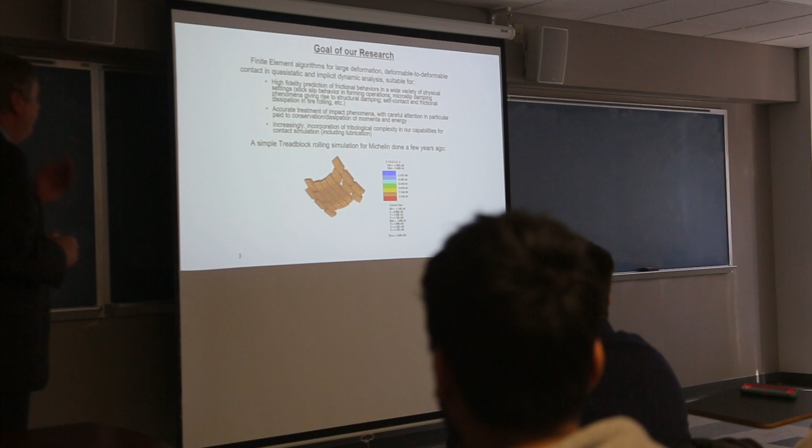So just to give you a little bit of an idea, again from a numerical point of view, how one goes about doing that. So I've already said a lot of this, but keeping in mind that I'm sort of a methods developer, the idea here is to come up with tools.

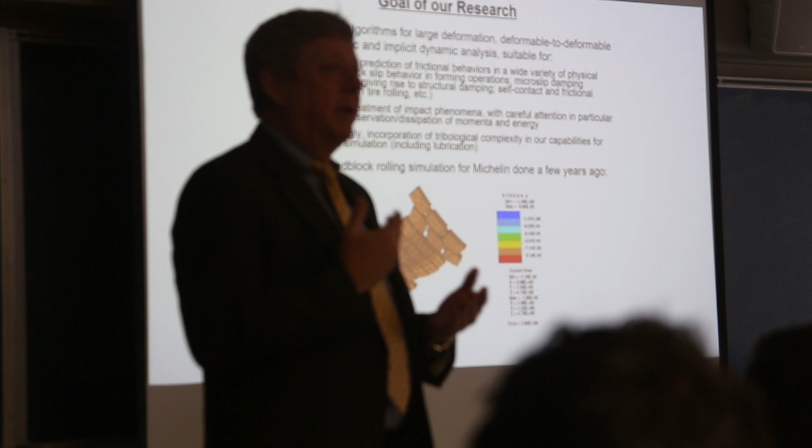You can think of them, hopefully, as being under the hood - not anything a user of a code like Abaqus has to worry about too much. But what we were really after was: use whatever friction model you want to use, whatever interface model you want to use, just like you employ a plasticity model or an elasticity model or an anisotropy model for a bulk solid. We'd like to give you the same sort of robustness if you have to describe contact interaction. But it's quite a bit different, right?

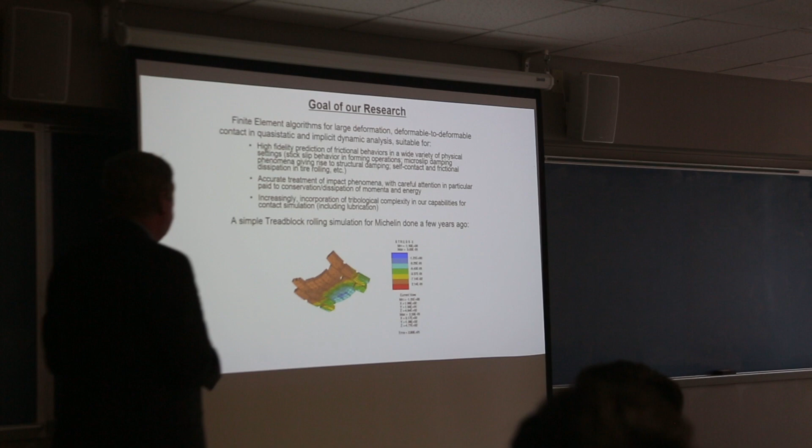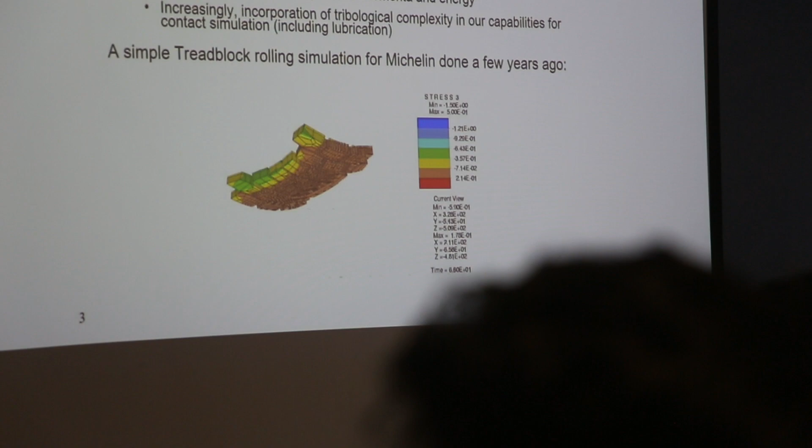And so I've got a sort of embarrassingly old movie here, but if you watch this thing go - this is a tread block simulation we did for Michelin a few years ago. So finitely deforming, basically this is a Mooney-Rivlin solid, actually contacting the roadway, which you can't see here. It's just taken as a rigid, transparent obstacle, right? That's actually the easy part of this problem. The harder part is the contact that occurs inside the sipes and the grooves as this thing rolls.

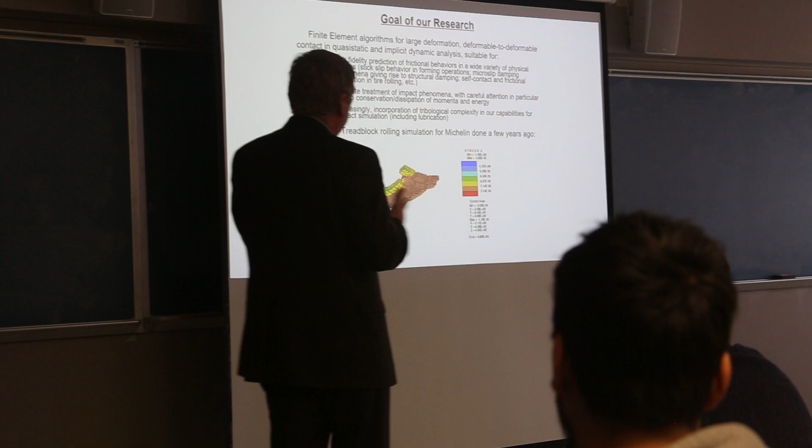And these are the kinds of things that, if you tend to run your tires too long, which I tend to do, you can actually see those wear patterns. And so the interest Michelin had was to actually model that and see if we couldn't get at the energy dissipation that was happening there.

And again, you can think of your favorite application. You've got contact, you've got friction, you've got large deformations, you've got potentially large relative motions. And so we'd like to come up with methodologies that will work without limitation on those things. And then, although I'm not going to talk about it a lot today, there's also some interesting things that come up when you're doing true dynamics, right? And you want to get transient phenomena - a lot of the same concerns come into play.

So I'm going to use, and I'll go through them pretty quickly, this set of slides that my colleagues at Abaqus gave me a few years ago, just to give you some ideas from the tire rolling industry. And again, you can visualize your favorite application, just to give you an idea of some of the things people would like to do with these methods and what's now possible. So I showed you our silly academic tire that we were doing to demonstrate concepts for Michelin. But in fact, if you're using industrial software these days, you can do these things pretty much in real time.

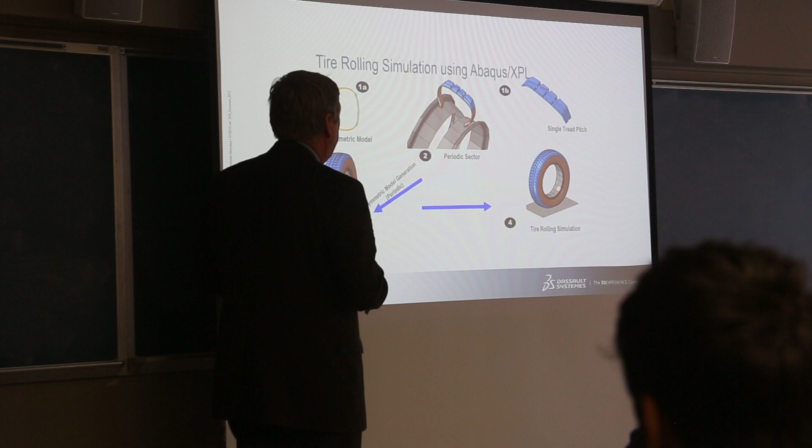Abaqus is pretty well connected with a lot of major tire manufacturers. People can look at two-dimensional, axisymmetric models, they can spin those, or they can develop full 3D models and literally roll those down the roadway.

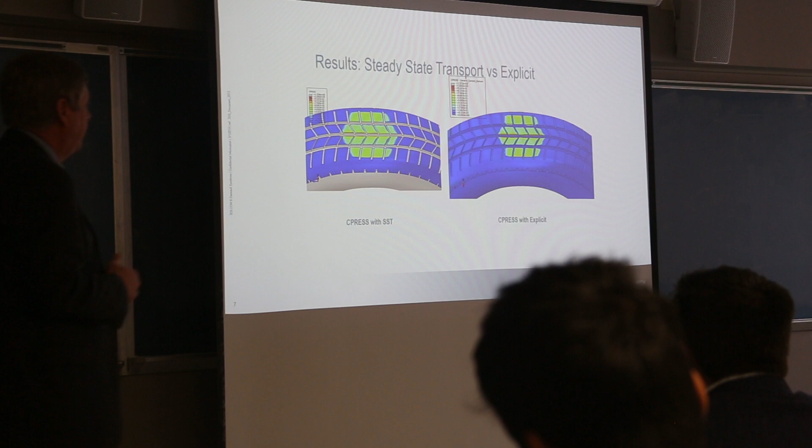There are some interesting things that can come into play here. You can just roll this thing down the road and try to understand the dissipation that's occurring within the tire. You can theoretically simulate things like skidding or cornering operations. All of these things are possible. You can look in detail at the slip profiles over a contact patch.

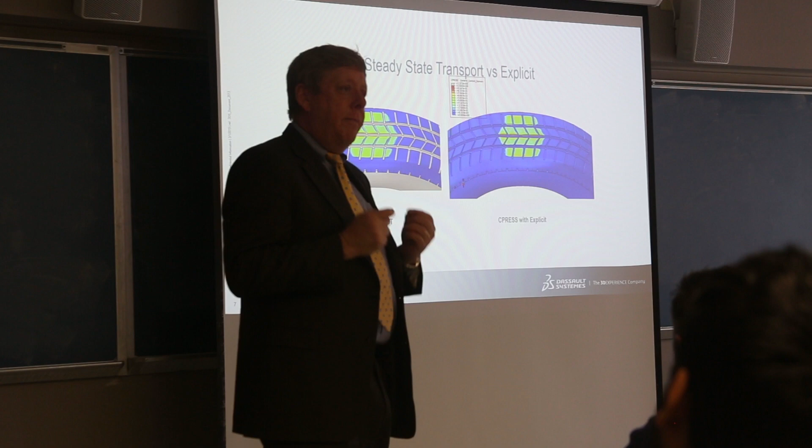Another feature of contact problems we were talking about in our meeting earlier is that oftentimes if you've got an interface, you think of taking a tire, pressing it down into a roadway, and then rolling it. The vast majority of that footprint is sticky, right? It's not, and that's a good thing, especially when it's snowing. But actually in a normal steady state rolling operation, there's what's called a kick-out region.

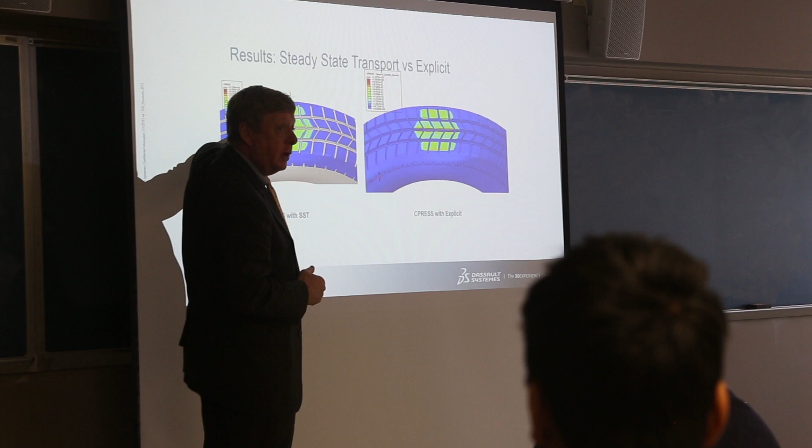So if this thing is rolling down the road, you'll have a highly localized band that's just being pushed, it's not rolling, on one side that you actually want to resolve, because since it's slipping there, there's friction there, right? And so that has to do with energy dissipation, and it's something we'd like to understand. So these are the kinds of things that these guys think about.

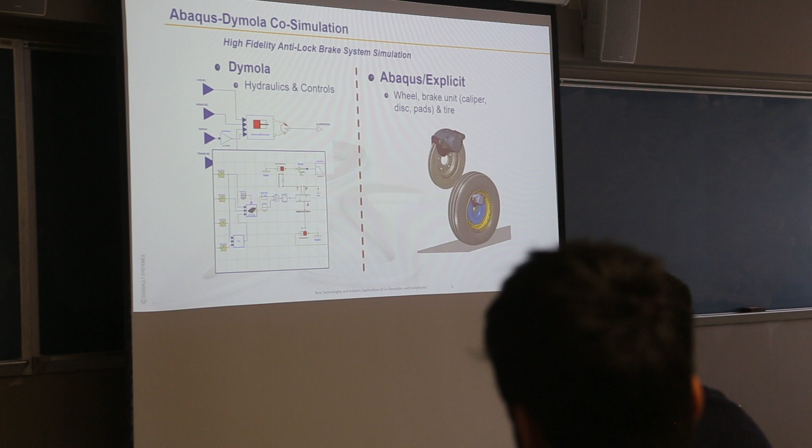It's actually possible to couple them with system dynamics models. So you can start to do things like coupling a tire with a brake system, experiment with different control schemes, for example ABS type of braking, and then look at what that makes happen in terms of the system dynamics.

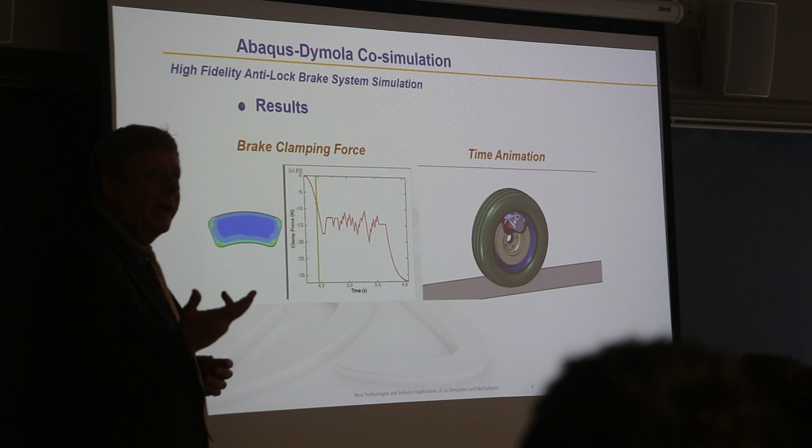So they can look at things like the clamping force that's necessary. Again, look at energy dissipation, which is going to relate directly to things like brake pad life, in a manner that's completely coupled with what the tire is doing through the dynamic system model.

This gets at something I'm going to talk about at the very end of the talk. Fluid structure interaction - I know there's folks here in civil engineering who are doing important FSI work. Wind engineering has to think about that, right? So it's a very common example.

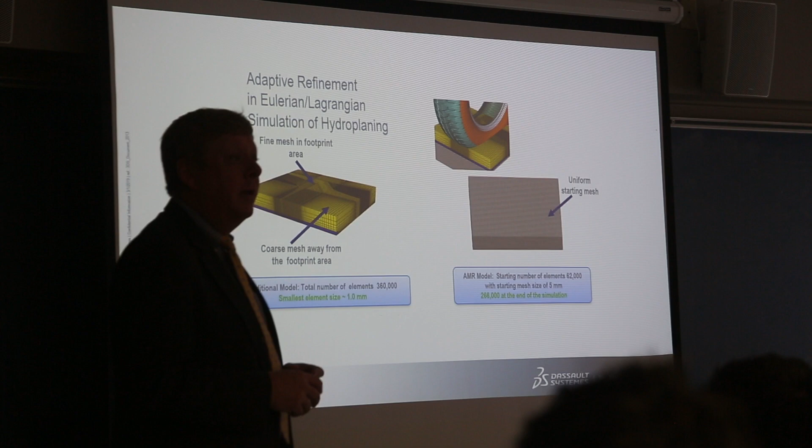But you actually see it in the tire business quite a bit too. Folks would like to understand, if you drive through a puddle, for example, what is the loss of traction? Can we actually simulate that? One of the things these guys have done, if you think about it, you've got a tire, you've got a roadway, and you've got intervening fluid.

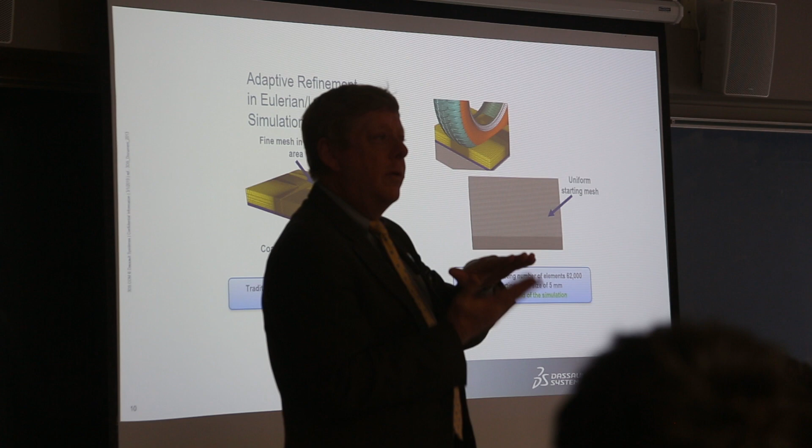And because it's a contact problem, you don't actually know a priori at any instant where the contact is going to be active, where the pressure in the fluid is actually going to be positive and helping to hold the tire up, and in what regions you've got a free surface. None of this you know.

If you think about it for a minute, in a Lagrangian meshing sort of way, you really don't want to have to fix a grid on the fluid and have the grid deform with the fluid. It would actually be better, think about how we usually do CFD, if you could take an Eulerian framework for the fluid and let the solid work through it, okay?

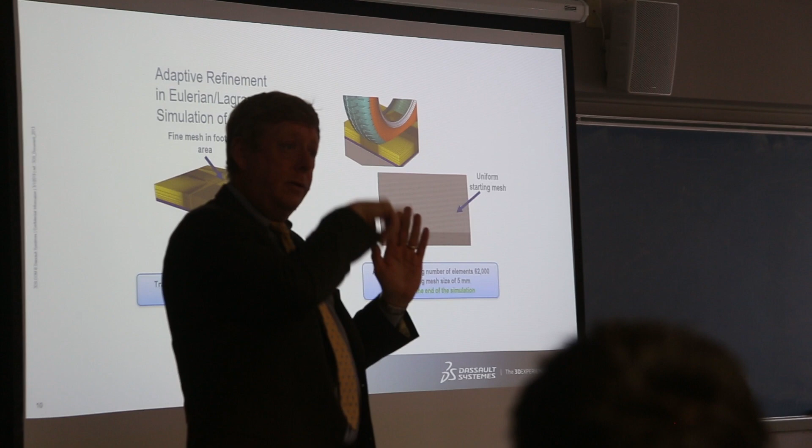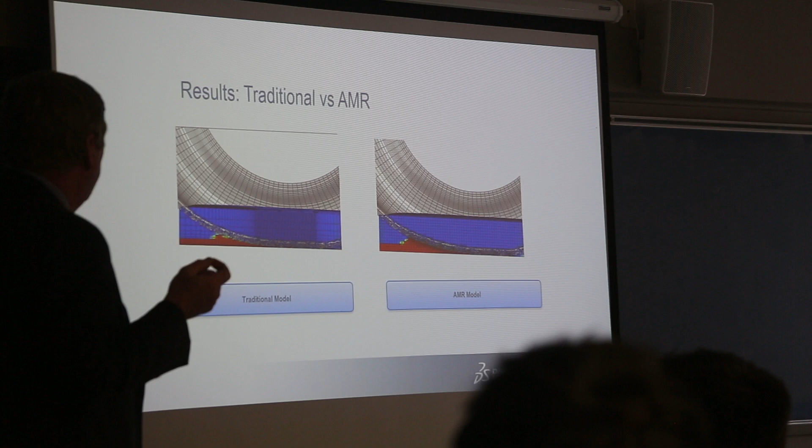So there are some methods, and I'm going to talk a little bit later about how we actually do this, where you have the capability to roll this tire through a puddle. And notice how this grid here for the fluid does not conform to the physical boundary. So there are ways to take care of those boundary conditions properly, and what they've also figured out how to do, you can't really see it very well here, is to adaptively regrid this region so that you get resolution of the dynamics that are happening there.

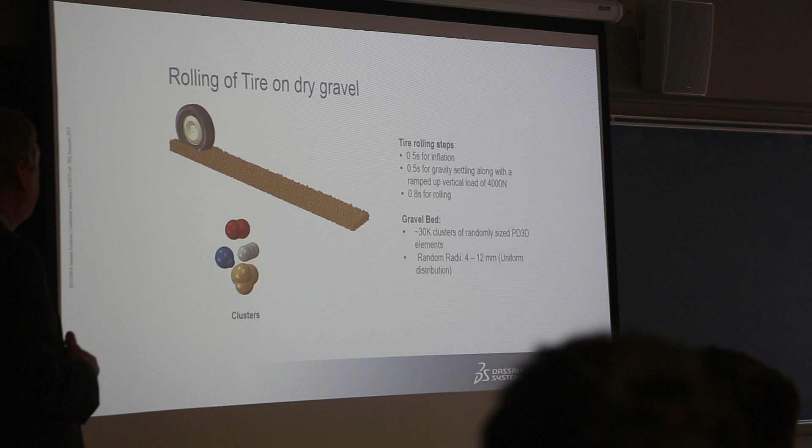So it's just one example, but this is the kind of thing that folks are interested in being able to do. There's also the whole topic of particulate dynamics in contact. In the tire industry, this could happen with snow, obviously, or with gravel. So here we've got contact between a continuum mechanically described solid, but then effectively particle dynamics. Having robust methods to do things like that is also of interest.

Okay, so again, let me just give a wish list of things that we'd like to do here.

Remembering we do numerical methods, I'd like to tell you something about how accurate this tool is and at what rate the error will reduce as you refine it. First of all, you'd like to know it's convergent—that if you use a finer grid, you'll get a closer answer. So we'd like to be able to tell you something about that accuracy.

The robustness is something I'll allude to in a couple of points. Let me turn this movie loose so you can see it. Keep in mind with all of these problems that we don't know a priori—we're going to put a boundary condition on this cylinder and drag it across this rubber solid. It's not a normal boundary condition. We don't know at any particular time where the contact is going to establish, where it's going to be free, or where the interface might stick or where it might slip.

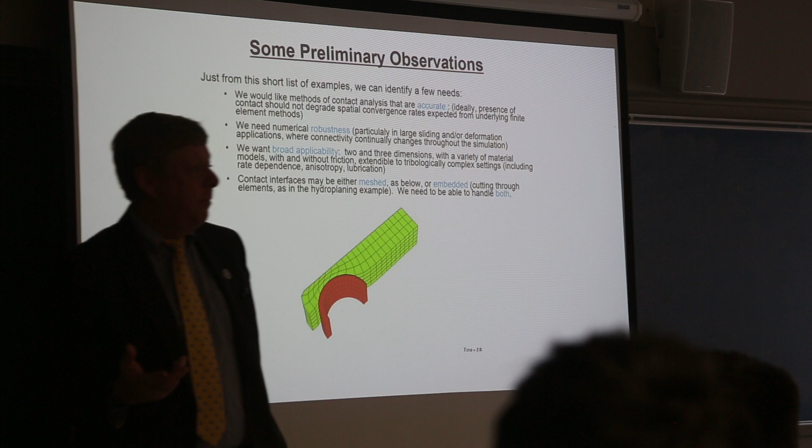We want the prediction tool to tell us that. The trouble is it's out of contact, then it's in contact—you'll see graphs in a minute. It's non-smooth. Most numerical methods, and I don't know how many of you do numerical methods, but think back to the first time you saw a finite difference method. We're always relying on something like a Taylor series expansion to derive a discrete method we can use.

So what do they tell you about Taylor series expansions? You're not supposed to apply them to things that aren't smooth. This isn't smooth because I'm out of contact and then in contact. It also isn't smooth because I'm sticking and then slipping, and it happens abruptly. So coming up with something robust, reasonably accurate, that we can use in 2 or 3 dimensions—all of that is a challenge, and I'm going to tell you a little about how we do it.

Let me give you an idea of what the equations are—just an intuitive idea of what we're talking about. Prior to the work we did here, this was the usual way to approach these problems. Then I want to talk about mortar-based methods, which is what we've thought about for the last 10 or 15 years. And like I said, I'll give a couple of extensions to related problems at the end.

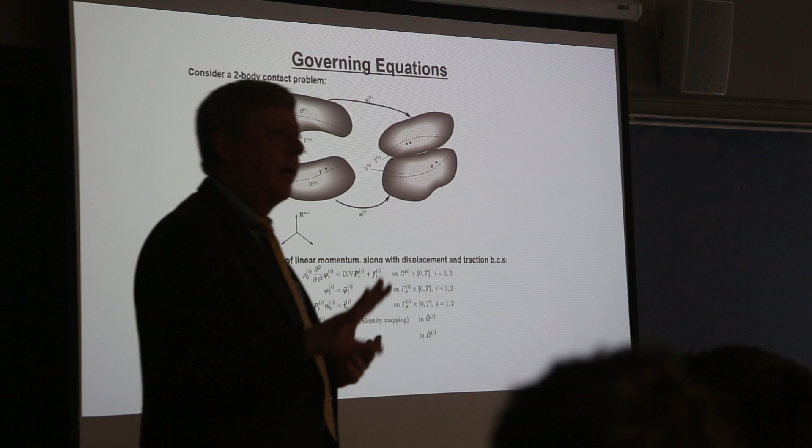We're interested in large deformations primarily, so by and large there will be some examples later that don't follow this formula. But by and large, we use Lagrangian methods, meaning the mesh you put on the solid deforms with that solid in time. So we have some reference unloaded configuration and some current configuration.

You can do this automatically or as a user specification, but the idea is you want to pick out all the points on the surface of either body and make sure they don't interpenetrate the other body. That's the idea of impenetrability. You've got your usual equilibrium, F equals ma, in continuum mechanical form. You can have displacement, force, or traction boundary conditions—we allow all of that. If you've got dynamics, you have the appropriate initial conditions.

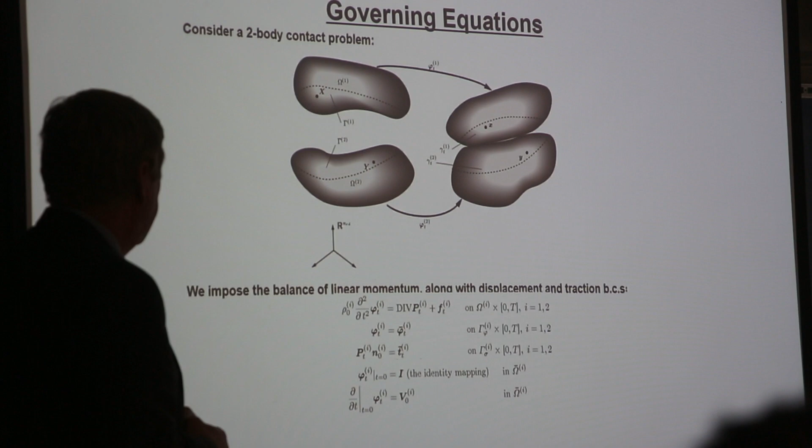But then you have to add these constraints, and these constraints are the ones that aren't smooth. If we were to draw a picture of them, this first one is sort of the out-of-contact, in-contact idea. If you've studied operations research or constrained optimization problems, one way to interpret this mechanically is as a classical Lagrange multiplier problem. You've got a sign function defined for each point on the surface of either body, or both. We define it as the distance between the point and the surface it's opposing, with a sign on it.

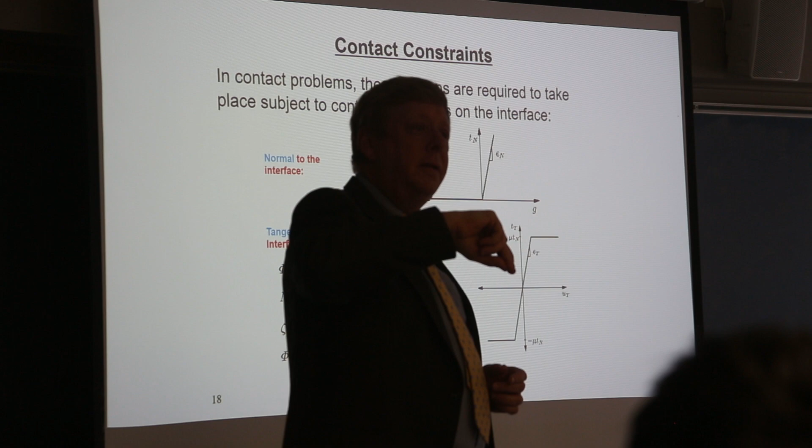The physical idea here is simply that point has to stay outside the surface of the other body. It can't go in, okay? So that's the g less than or equal to 0. This Tn is, in mechanics, we call it the contact pressure. But mathematically, that's the Lagrange multiplier that's going to enforce that constraint.

Now, the thing that's a little bit different here is this is a continuum mechanical description, right? So that Lagrange multiplier, at least in theory, could be defined for every point on the outside of either of those bodies. And we have to figure out the regions where we require a contact pressure to be developed to keep those things from interpenetrating, okay? So that's the idea.

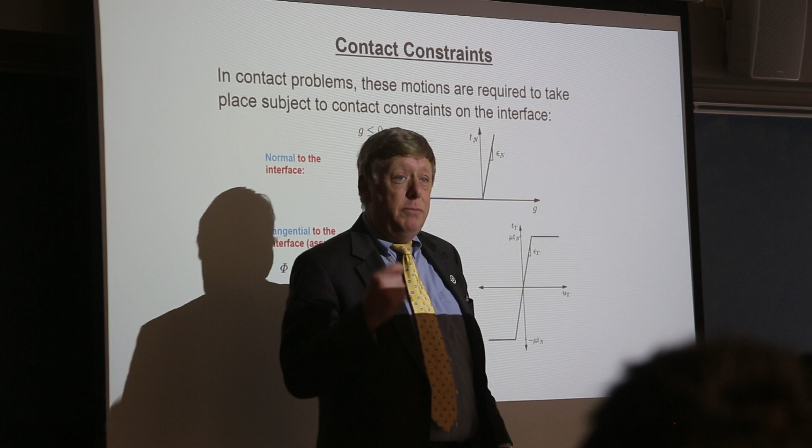And then what we're going to do here, if you study plasticity theory for the friction law, is something quite similar to sort of a rigid plastic type of idealization. The only difference is that rather than having a yield stress like you'd have in rigid plasticity, our yield stress, if you want, is going to be mu times the pressure, okay. So in other words, if that confining pressure gets bigger, then typically speaking with most interfaces, the frictional yield stress also increases.

So we've got non-smoothness here, we've got non-smoothness here, and we have a different variety of optimization techniques to try and solve for those multipliers.

So skipping a lot of details, if we take this system and discretize it, which means we put a finite element mesh on it, you end up with a structural dynamics equation set that looks probably pretty familiar to most of you, right? So you've got your inertial terms. If we were dealing with a linear system, then F internal would just be K times D, okay? But it's basically the forces generated on the nodes by the stresses inside the bodies. We'll talk about this guy in a moment, and these are just your applied loads on the right, okay?

So this would just be your standard structural dynamics system. If you were doing structural dynamics in sort of a civil engineering sense, you might have a damping matrix times d dot in there too, right? But the tricky guy for us is this contact force vector. Without getting into too much detail, those are the forces required on nodes to keep those bodies from interpenetrating with each other, okay?

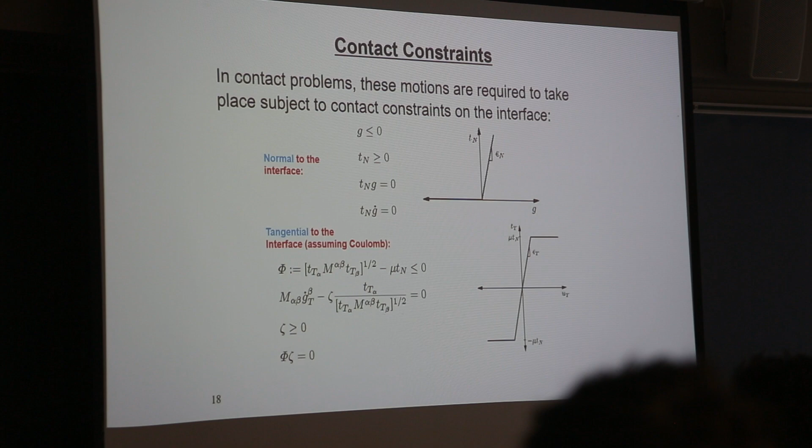So the question is, we have very standard finite element recipes for how to go from, say, let me take the internal stress. So if I take this, which is basically div sigma equals F, right? You can apply a standard finite element recipe to come up with those internal forces in a finite element sense.

What the Mortar method is going to be about eventually is how to do the same thing, to turn these constraints, which are again pointwise fields over the surfaces of both bodies, into what I'm calling FC here, okay? So it's a spatial discretization problem. And I'm going to walk you through how we figured out a way to do that that gives us some of these characteristics we said we wanted.

Now, if I go back to the time when I was a graduate student, this is how everybody did contact, and the first contact algorithms I wrote looked like this. Imagine you've got these two bodies, you've put grids on them, right? Now you're trying to decide, sort of heuristically, where do I enforce this constraint that nodes don't go inside the other body, right? Well, a natural choice to make is just to pick all of the nodes on one side of the interface or the other side, or maybe both, and enforce that constraint in a discrete way, pointwise. Doesn't necessarily seem unreasonable, right?

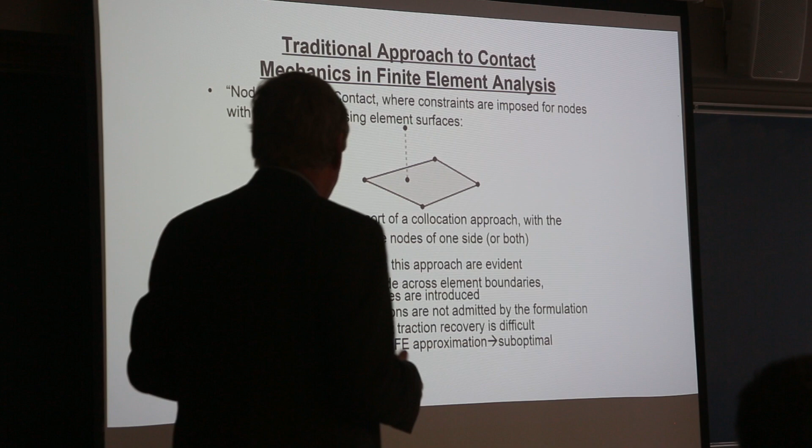So a mathematician would call that a collocation approach. You've got some condition that you're wanting to enforce, and you have to pick a set of points where you're going to enforce it. The easiest way to do that is just to say, well, I'll do it at the nodes, right? It seems reasonable. Most of the algorithms we actually use for a lot of contact problems are based on it. It's actually not right. At least it's not right for the most challenging problems, and I'll show you why that is. In fact, I've got a few quick examples right now that give an idea of that.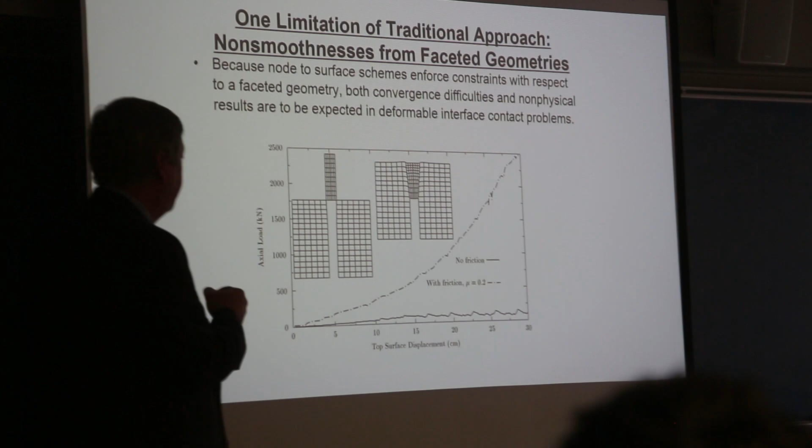So this is actually out of my dissertation, so this is getting quite old at this point. This is a 2D problem, an axisymmetric problem, where the axis of symmetry is here, and really all we're doing is trying to drive a peg into a tapered hole, okay?

Notice one other thing too, that both sides of this interface are deformable, right? So we said that these grids are going to follow the solid as it deforms. So one of the problems here is if I'm going to pick either these nodes or these nodes and say don't interpenetrate the other surface as we do the simulation, that surface, or that body that that node is looking at, is faceted, right? And it's completely artificial. That faceting comes from the fact that I put a finite element grid on that solid, right?

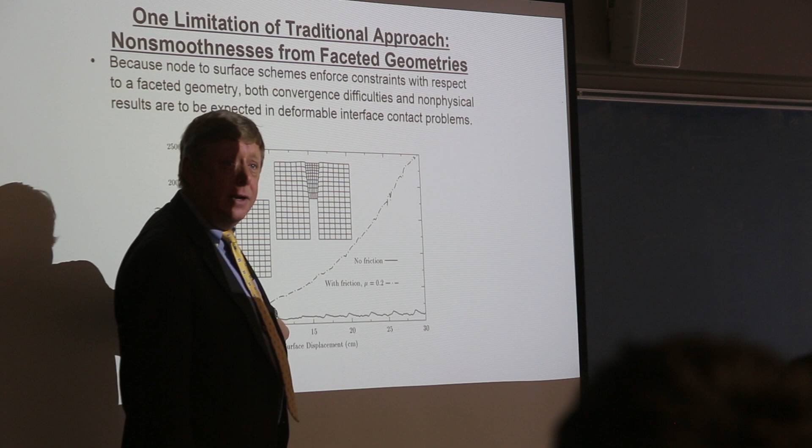And you can actually see that faceting as you get bumps in the forces, right? So from a physical point of view, if you're sitting there on your computer screen with your coffee and you see this, you sort of feel good. You think, okay, well, it's at least enforcing the constraints. But we're usually interested in backing out things like what are the forces that are developed? Is it going to damage the surface? This kind of thing. And it's hard to make a lot of sense out of this. We certainly know it's not physical, right? So that gives us maybe at least some kind of clue that this collocation is not the right thing to do.

I'm giving away part of my answer here, but about the time we started to work on this, people were thinking about problems of just joining grids, okay? Which, if you think about it, and I'm going to talk a little bit more about it in a second, is a really handy tool to have.

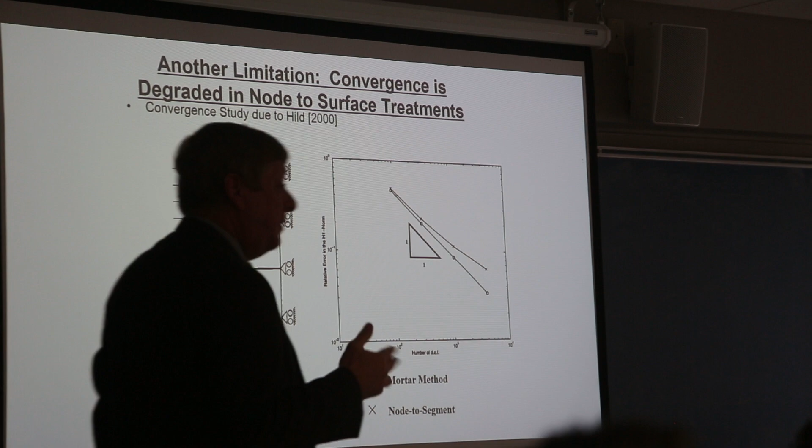If you've done any finite element method work, just as an analyst, right, you'll realize you may use a CAD tool to generate a grid for a piece, and you may use a different CAD tool or another description to generate a model for another piece, and those things are supposed to be glued together. It's a real pain in the neck, oftentimes, to make those grids match up, right? Your finite element textbooks will tell you the grids should match up. The convergence characteristics are only guaranteed if the grids are conforming, right?

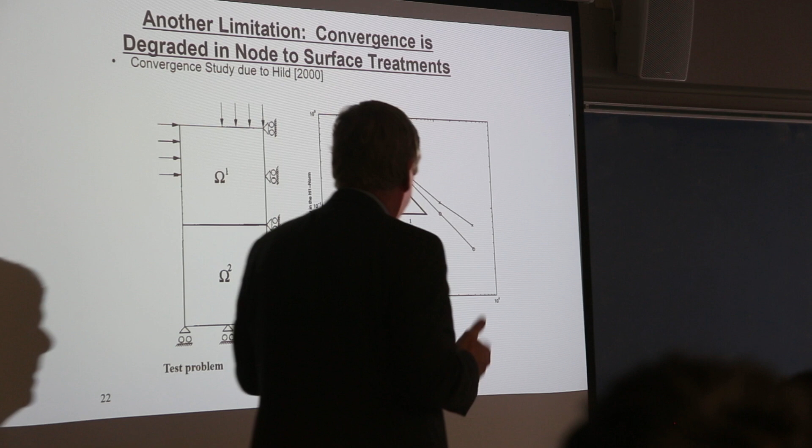Well, who cares if they're not? Well, one reason you care, remember we said we wanted to be able to guarantee you a rate of convergence, right? So if you're using linear elements, in other words, piecewise linear approximations of displacement, for example, then the theory tells you that the stresses should converge at order 1, right, as you refine the grid. And what happens is when you don't match up grids, you don't get that. It still converges, but you can actually see an obvious degradation in the rate of convergence. So remembering that we're going to have really fine scale stuff on the interfaces that we want to resolve, this is something if we can fix, we'd really like to.

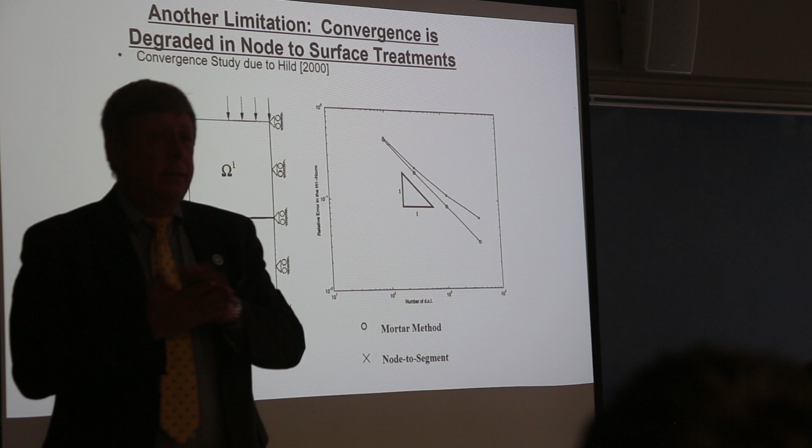This particular example is one where there's sort of a boundary put in here and there was actually friction on it. But it's the same idea, whether I'm trying to glue that interface together or whether in the applications we're going to consider I want it to be free to slide, that degradation of convergence is a problem.

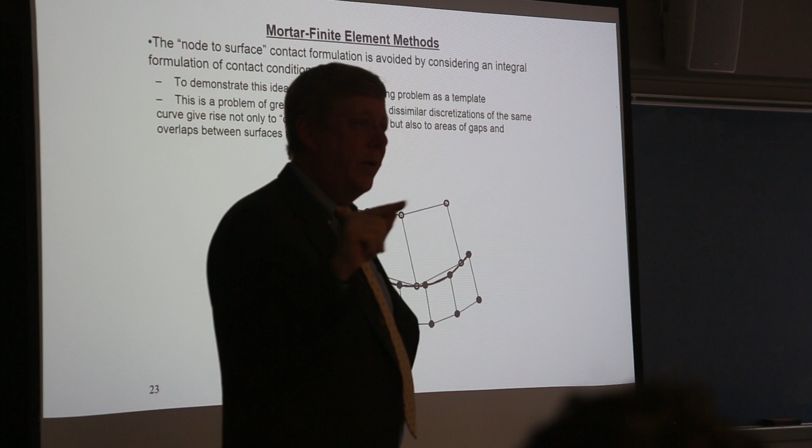So I'm going to actually take that mesh tying problem and use it to describe our proposed solution. So the mortar finite element method, if you're not used to thinking about numerics, you can literally think about it, and where the name comes from is the mortar between bricks. So you imagine a brick wall, the bricks are your elements, and the question we're asking here is how do we design that mortar in a mathematical sense to give us some of these characteristics we said we wanted, the right convergence rate, and so forth and so on, and a little bit more robustness.

So I'm going to consider the simple problem first, where you just have CAD Model 1, CAD Model 2, and I want to glue them together. Forget about all the contact stuff, I just want to glue them together.

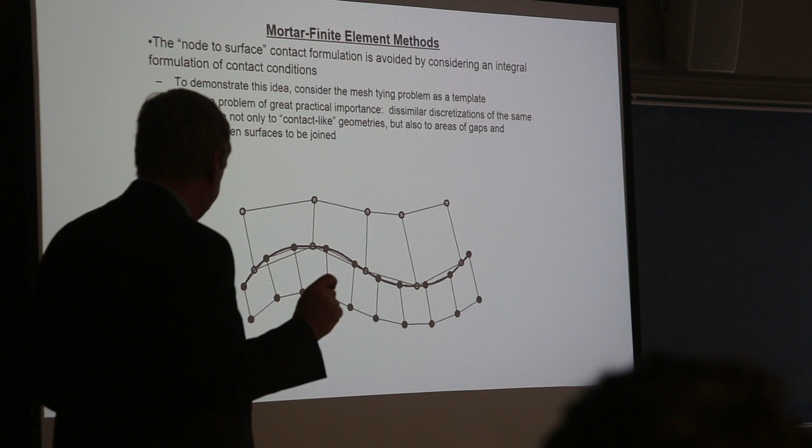Okay, how do I do it? That's sort of the approach here. Now, by the way, I should go back to this. If I were to do the collocation approach, I would just take each one of these nodes on this interface and say you can't move relative to that surface that you're sitting on. So you literally pin it there, okay? That has the problems we discussed before, right? You get less convergence, and in some cases you get non-physical results. So the question is, is there something else you can do?

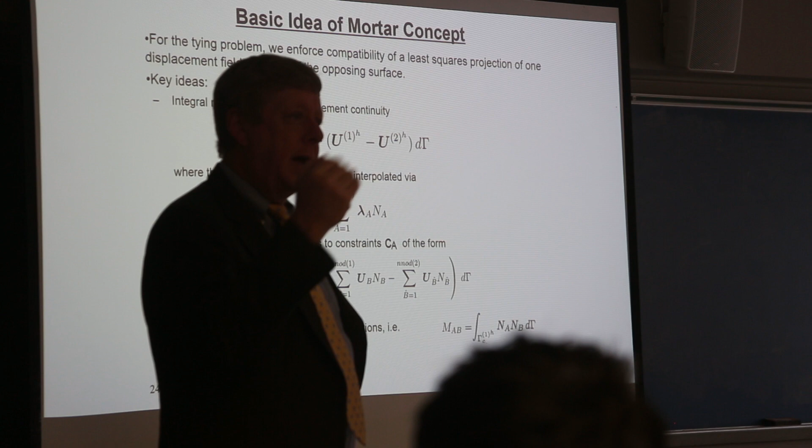What you end up with, you want, in a continuum mechanical sense, is the displacements to match on either side of the interface. That's the idea of gluing those two models together. So we're going to introduce a Lagrange multiplier, and we're going to do that using an area integral.

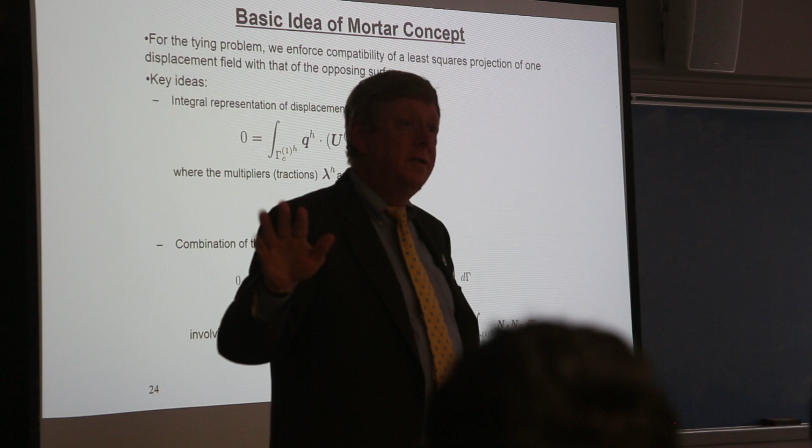Now, for those of you who know a little bit about numerics, if we were going to do a collocation method, there's the whole question of how are we going to approximate spatially that multiplier field, right? What I would do if I were doing a collocation method is it would be a sum over all the surface nodes of delta functions, times nodal values. So what you do in a mortar method is you just use the same shape functions you're using for the displacement. It's kind of a natural choice, actually. It turns out to be right. And you use those to expand the approximation for the multiplier field over the surface. And you just plug it into the equations and crank it out.

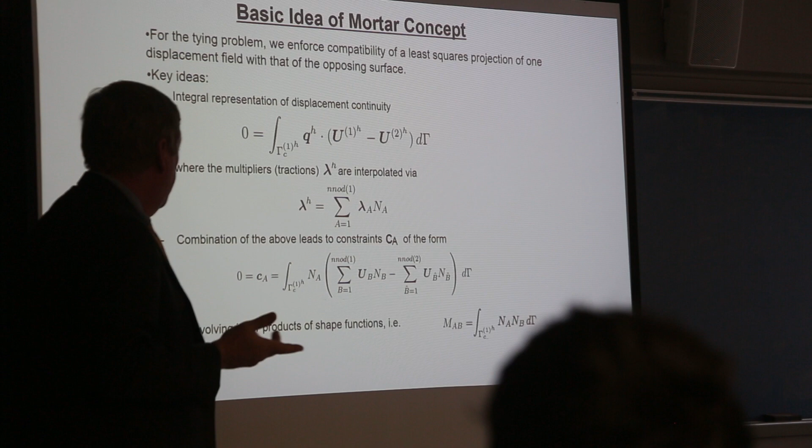And what you end up with is a set of nodal constraints, these CAs, but now they're little area integrals. And they're really tricky area integrals because they're inner products of shape functions on one surface with shape functions on the other surface. This is why nobody did it, because it was such a nightmare to figure out how to evaluate these integrals. I'll give you an idea in a second as to why that is.

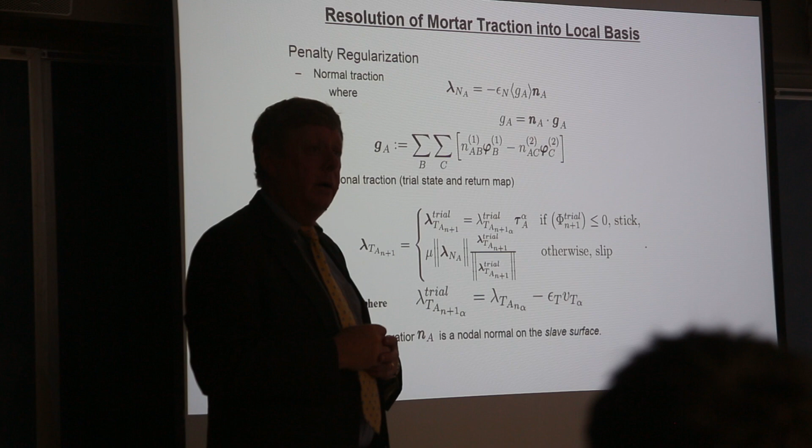Now, if I want to handle contact, and I'm just going to sort of obscure a lot of details in the interest of time. If I'm doing the tying problem, once I solve this issue, I've just got a field of these forces, basically a traction over the interface. If I want to admit contact, then all I need to do is take that traction, resolve it into a normal part and a tangential part, and then impose those constitutive models we talked about before. So out of contact, in contact, in the normal direction, and then something here that, if you're familiar with plasticity theory, looks a lot like a slip condition, or yield condition, in plasticity.

There's no particular point in dwelling on this too much once we've figured this out. The real point is how we're going to do those approximations of those inner products - integral over the surface of shape function on one surface times a shape function on another surface. There's a problem there, right? If you know a little bit about finite elements, the underlying expansions describing those shape functions are different for the two different bodies. You have to somehow resolve that.

So what we do in 2D, it's actually not too much trouble. You take this surface, so here's body 1, here's body 2. You parse it up into piecewise smooth pieces, and you can go ahead and evaluate those integrals, summed over the interface. It's actually not too bad.

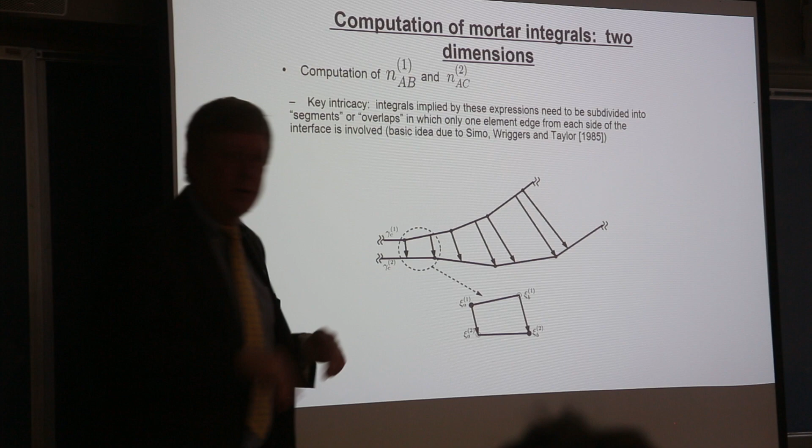So we actually, a few years ago, with Mike Puso out at Livermore, figured out a way to robustly do these integrals. And then another detail I'm not going to talk much about here - it's one thing to evaluate the integrals, but then remember, our global system of equations is nonlinear. We're going to use Newton-Raphson iteration of some sort to get this thing to equilibrium.

So I not only need to evaluate these integrals, but I also need to evaluate their derivatives with respect to the underlying displacement fields. So it is involved, but it is doable. And basically the idea is it better be worth it. Okay, let me kind of recap where we are.

I still have yet to show you, although I've given you a little bit of evidence, that if I go to this trouble—and the folks from the domain decomposition community did this work for us a few years ago—they showed us that if you enforce these constraints in this sort of way, you'll get back those rates of convergence we expect from the method. Now that's a pretty good deal, right? Because we're violating one of the basic rules of finite elements, which is we're not worried about the grid being compatible, and we can still recover the right rate of convergence.

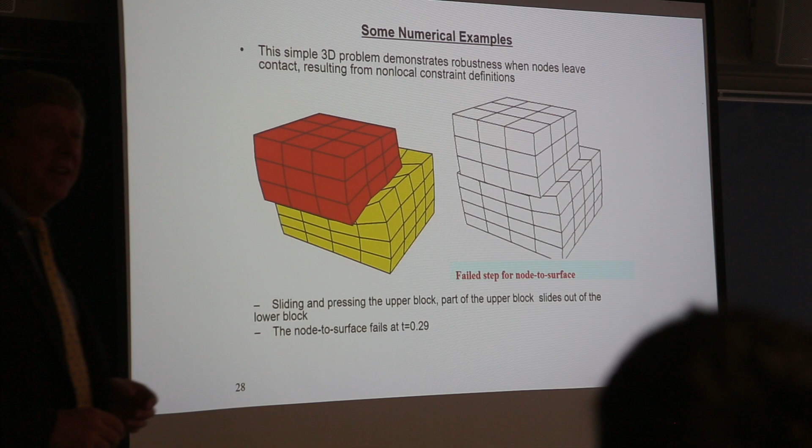So this is a really silly example, but it actually gives you the idea. I'll run that again in a second. The idea here is I'm going to take this red block, push it down into the base block, and just try to move it tangentially. Now think about what's going to happen.

If I do sort of the old node collocation approach method, those nodes kind of fall off of cliffs, right? So I push it down, I develop a very high nodal force to prevent the interpenetration at each one of those nodes. But then as I move this thing progressively closer to the edge, at some point these nodes leap off the edge, that force goes to zero, and the Newton-Raphson method just can't converge it, right?

The point is that with a mortar, which I'm showing you here on the left, it smooths those operators because the constraints are non-local, right? They're evaluated over those sort of funny polygonal areas that I showed you before. So it smooths the operators. And so there are a lot of problems like this, particularly for deformable-to-deformable contact problems, where you sort of can't get these traditional methods to even work, okay? And because of the smoothing here, that's the sort of unexpected bonus we got—the robustness.

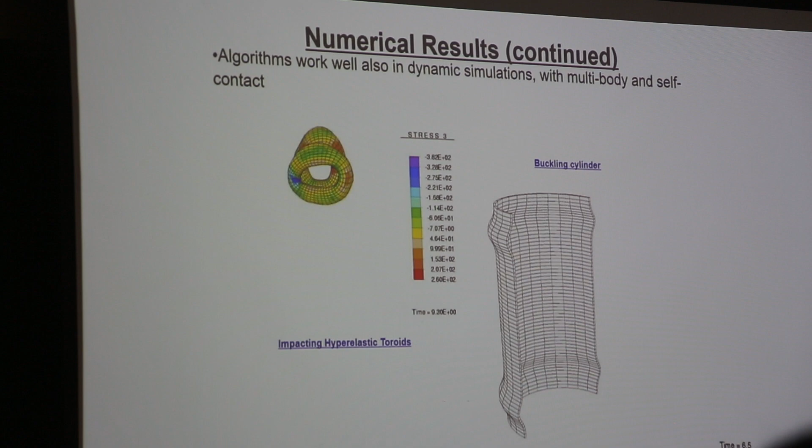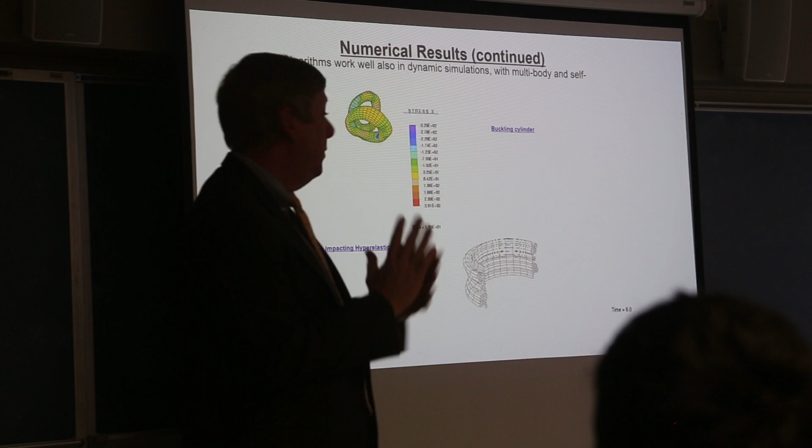This is Bin Yang's work, who was one of my PhD students a few years ago. The one on the left is dynamic. The one on the right, which I apologize for the quality of, is actually a crumpling cylinder. This is the kind of thing that folks doing crumple design at Ford and places like this are interested in. An important dissipation energy mechanism is being able to crumple these things, so we like to be able to simulate that, and you've got contacts happening throughout. We were able to show that not only did this method give you more robustness, but that it was pretty generally applicable.

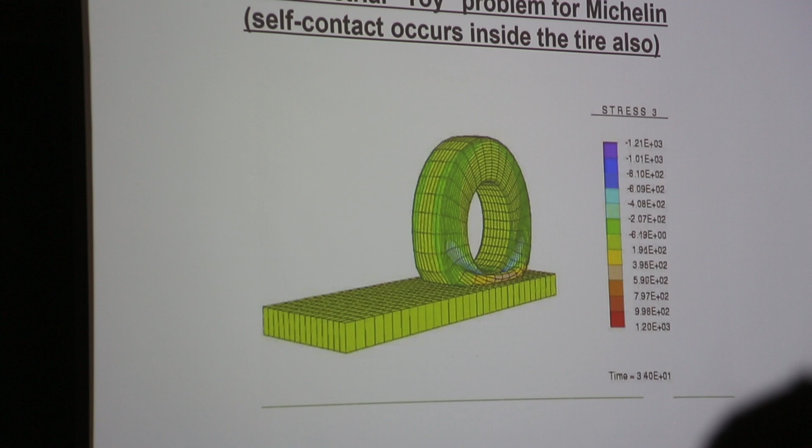Another Michelin toy problem, which actually got Ben his first job—because he went to Abaqus and showed this very movie, and they knew that none of their versions of Abaqus could do this problem, and they offered him a job. So it's good sometimes if you're a graduate student to have that killer app you can show somebody. It doesn't look like very much now, but it was a big deal then.

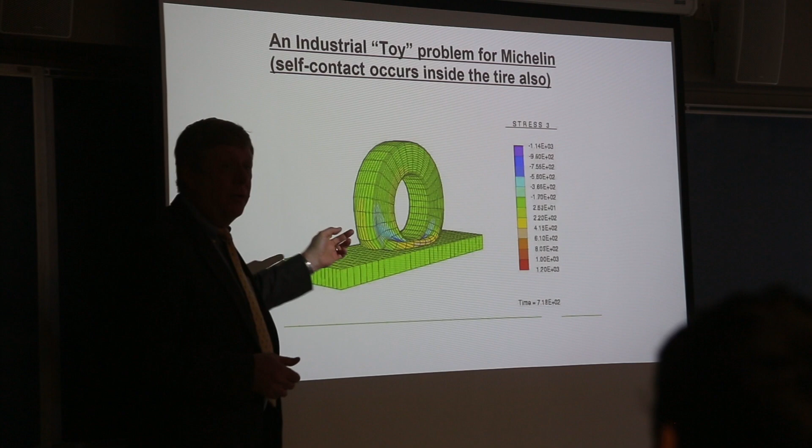The idea here is this is actually a run flat tire, which was all the rage for a while. If you know anything about run flat tires, the failure mechanism is basically on the inside of the tire—they put a lubricant in there so the thing can run flat for some distance, but at some point that lubricant gets hot enough that it starts melting the rubber. So the idea is they just wanted to understand those dissipation mechanisms well.

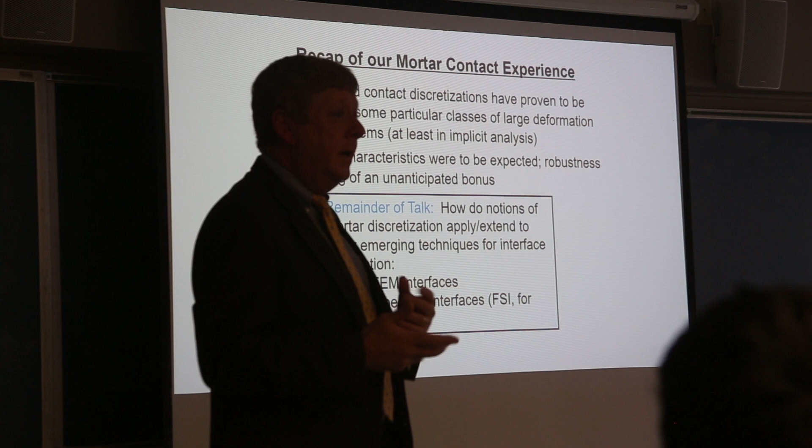So it's a pretty cool method, right? It is not the tool for all problems because it is expensive. Doing all of those area integrals I showed you earlier is an involved analysis. It's much more heavily coupled across the interface than traditional methods. But oftentimes it's the difference between being able to do the problem and not, because of the robustness. And we didn't really guess the robustness—that was something we found out with time.

So what I promised to do at the end is show how some of these ideas are interesting in terms of extending them to other applications that involve either different types of contact or fluid structure interaction.

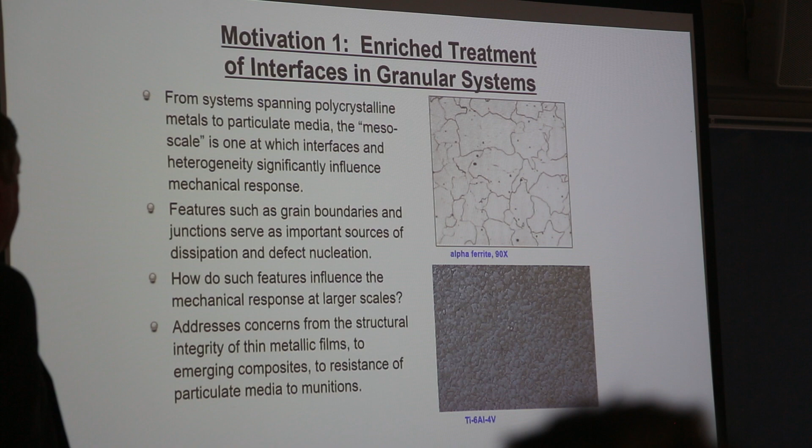This was actually work we were doing for Sandia a few years ago with a colleague of mine, John Dolbow, who works on extended finite element methods—I'll tell you more about those in a moment. What the Sandia guys wanted to do is look at crystalline microstructures, and they were curious whether there's a way to take a topology like this, in 2D, though 3D is much harder.

Again, what your finite element textbook tells you is that your grid should be compatible across grain boundaries, right? That's maybe practical in 2D and almost impossible in 3D.

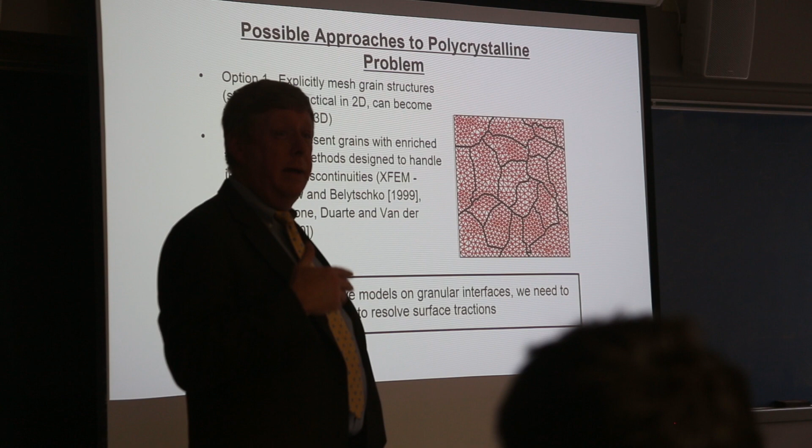And to add another level of complication, these guys wanted to do stochastic methods—they wanted to run these simulations thousands of times in a Monte Carlo sense. So they really didn't want to have to generate grids that matched up over each grain boundary.

What they were interested in is: can I give a grid like this, which pays no respect whatsoever to grain boundaries—this is sort of what extended finite element methods are designed to do—and still get a reasonable answer. I'm going to go a little quickly here so I don't run out of time.

We were also involved with some energy harvesting work, which leads to the FSI stuff I'll show at the end, that had us interested in this as well.

So the idea here is, let me give you an idea of the equation. Suppose I've got two grains. I've told you I'm going to try to figure out a way that I don't have to put element boundaries exactly on that interface, so they can pass through somewhat arbitrarily.

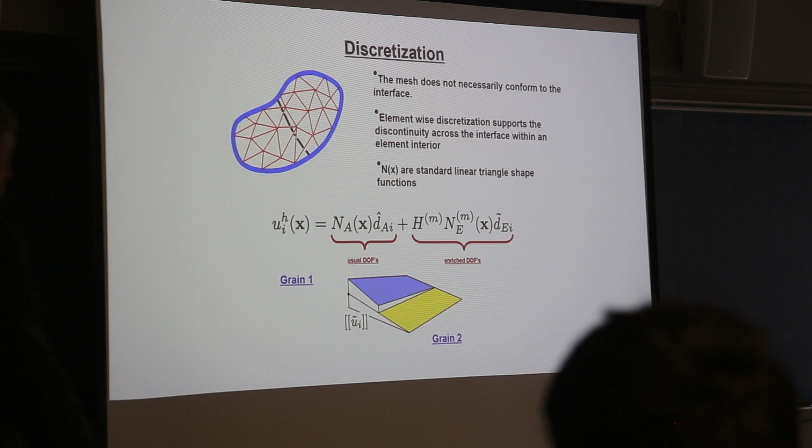So really what we do here is what the XFEM people call enriching the displacement field. And what this really means—I think I've got a picture here that shows this well—is you build in the possibility for jumps in the displacement field as you cross a grain boundary.

So this is not a finite element method anymore. It's what we would call an enriched, or enhanced, or extended finite element method. And you use spatial Heaviside functions to do it.

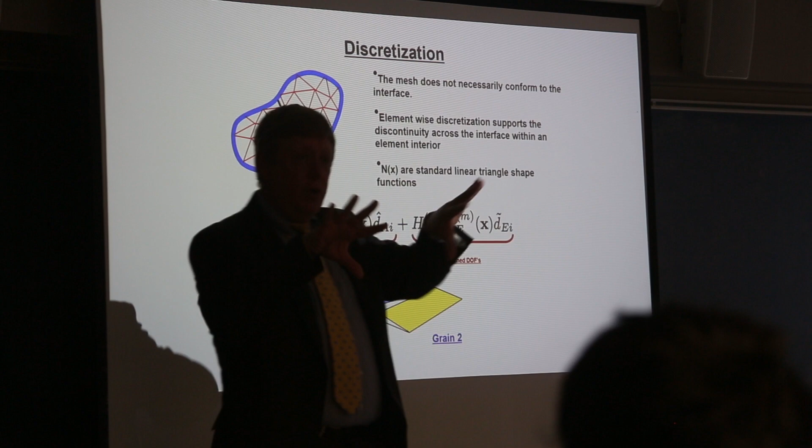Skipping a lot of details, what we're after here is using methods like this to allow these grain boundaries, if you like, to come apart. And then we're going to put the Lagrange multipliers back in—remember the tying problem—to enforce compatibility, or if we want to let it slide, we can let it slide.

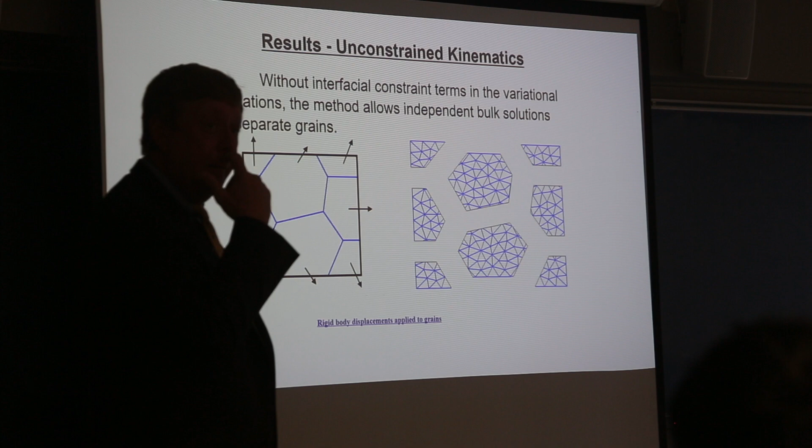So your first naive impression would be, let's use the trick that worked when we were doing contact problems, which is we just use the displacement shape functions to describe those multipliers. That is a disaster. I'm going to skip the equations and just show you what you get.

The idea behind stabilizing this multiplier field is simply to put in more displacement degrees of freedom, or what are called bubbles. If you've studied finite element methods a little, this comes up in incompressibility too — there's something called the LBB condition. Basically, that condition says that when you have a mixed problem, in this case between pressures and displacements, there's an inequality that needs to be obeyed between the number of displacement degrees of freedom, roughly speaking, and the number of pressure degrees of freedom.

If that gets too different from what's happening in the underlying medium, you get the sort of oscillations we saw a couple of slides ago. So this is a pretty standard stabilization method, and it actually works. It also gives you the proper rate of convergence.

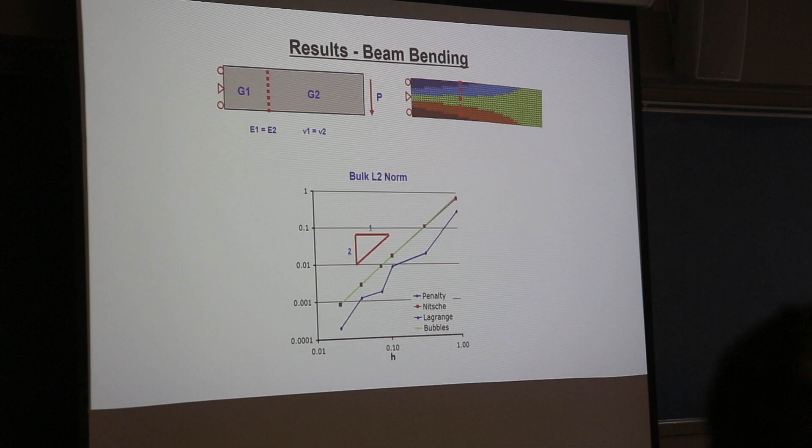What people have actually been doing for quite some time now is using methods related to mortar methods, but you have to enrich the displacement field to give the analyst flexibility so they don't have to grid all these grain boundaries. So this is a pretty attractive method. Again, you see the unstable result on the upper left, and the stabilized result on the upper right.

Finally, I'll conclude with fluid structure interaction — similar motivation, different XFEM. The way to think about this: suppose I've got, say, a bathtub, with a deforming, squishy thing that I'm going to model using a Lagrangian solid. That can be this blob B, floating in a pool of water.

The idea is to use an Eulerian grid for the water, kind of like I was talking about earlier with the tire going through a puddle, and a Lagrangian grid for the solid, which gives incompatible grids on that fluid-structure interface. We've had some success in recent years applying these principles.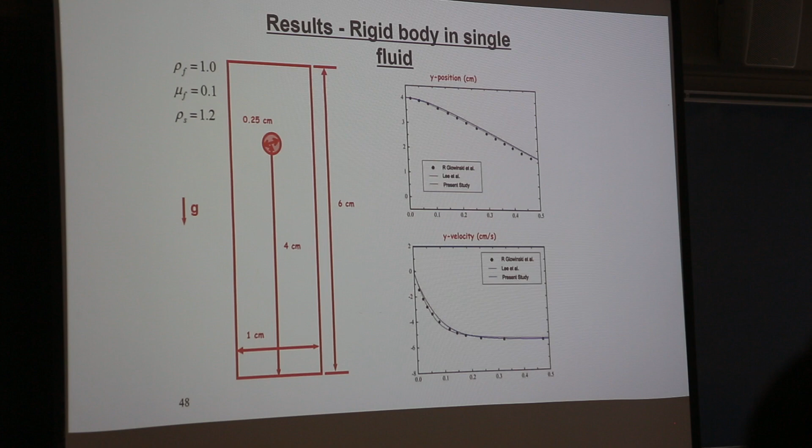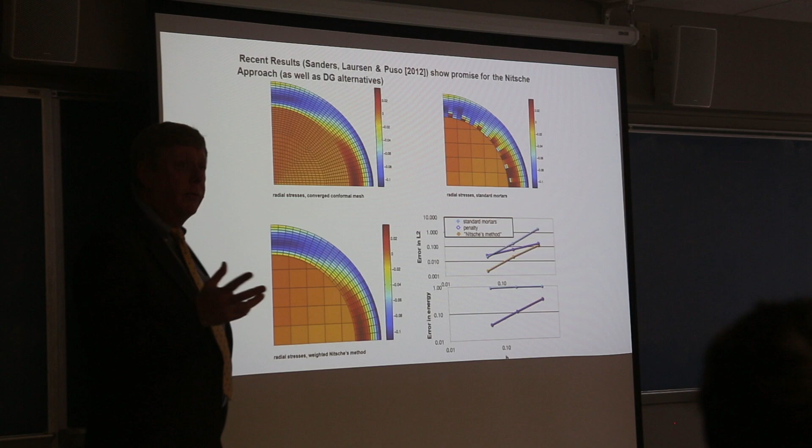Jessica Sanders, who did this work with me and then went out to Livermore to work with Mike Puso on their production codes, was able to show — for both fluid mechanics and solid mechanics applications — that these same stabilization ideas not only worked quite well but could be generalized to large deformations. They're really discontinuous Galerkin methods, which I won't get into here, but it's the same principle we've been discussing that makes those work.

So, just to summarize my story — and it's pretty well timed — if we have time I'll take any questions people might have.

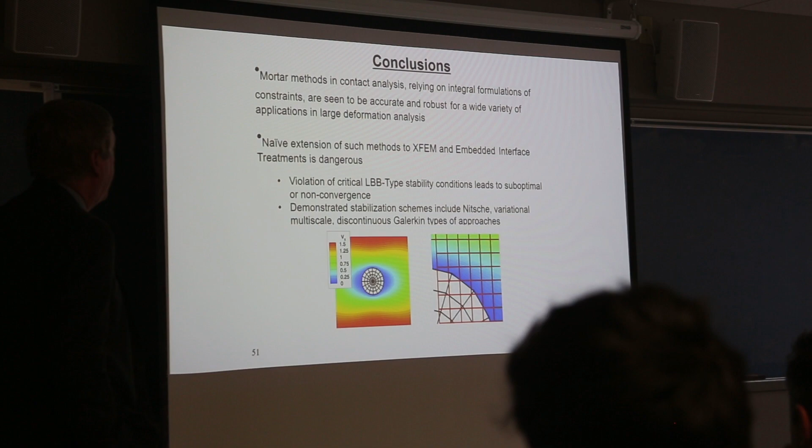Probably not surprisingly, it's often true in science that we look back and say, well, that should have been obvious. Finite element methods are predicated on taking the governing equations and weighting them in a variational way over volumes of material. It probably shouldn't be a surprise that we should do the same thing with interface mechanics — which is effectively what we're doing here.

The nice surprise is that the right thing to do gives you the convergence you should get, and it also has this nice benefit in large deformation problems of giving you quite a bit more robustness. If you've ever had the experience of running a nonlinear finite element code and doing contact, you'll know how frustrating it is, because this non-smoothness bites you all the time. So the smoothing that these operators give you is really attractive.

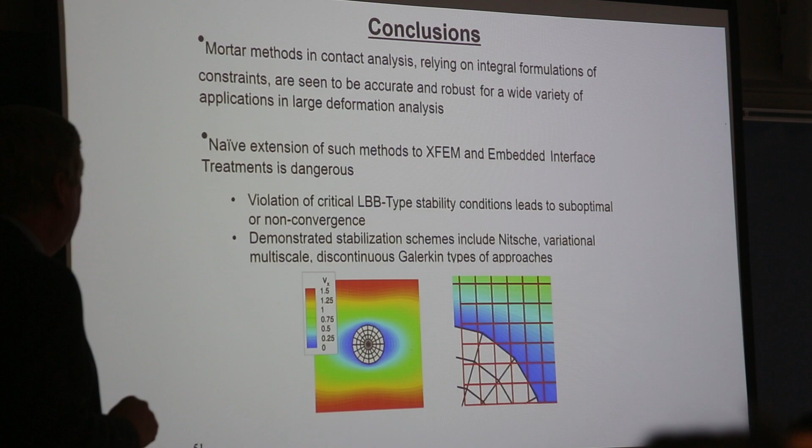The other thing we've learned, which I tried to show quickly at the end, is that if you extend these to XFEM and embedded interfaces, you can do it, but not in a naive way — there has to be a notion of stabilization. I think this is really an active area of work now. There are a lot of folks thinking about FSI in a different way, and the methods they're using, at least in the finite element world, are quite closely related to these mortar methods that I started my talk with.

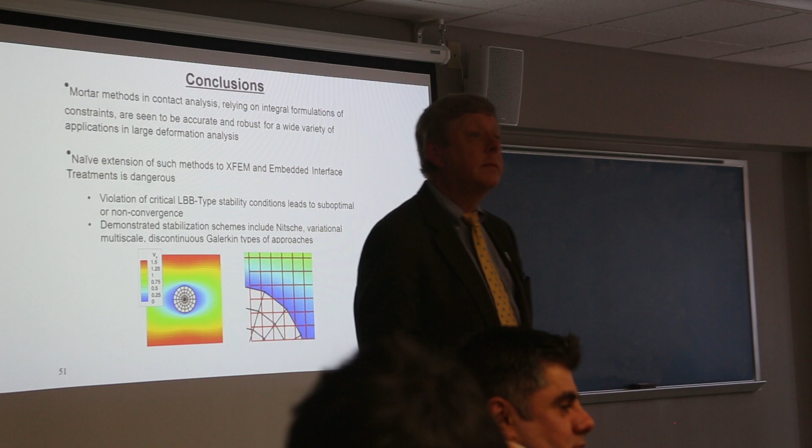One concern is about the well-posedness of the original problem, with the linear momentum balance and the contact constraints. With rigid contact, there are issues of well-posedness, and with Coulomb friction too. When a simulation doesn't work, I wonder, are we solving a poorly posed problem, or is it a nice one?

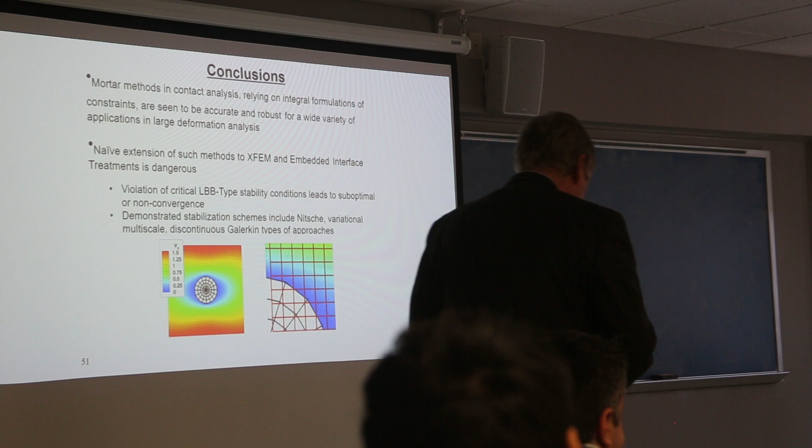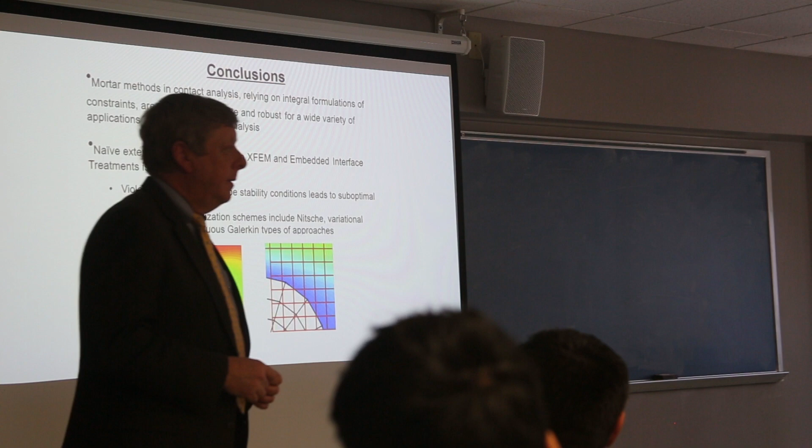Right, so yeah, he's right. He's asking the question: if the original continuum mechanical problem is not well posed, how is that going to show up here, and how will we know if we have a problem? It's pretty heuristic, I have to admit.

The most serious well-posedness problems are actually in Coulomb friction. If you go back to the work that Kikuchi and Oden did in the 80s, they give you a number of examples showing that, to be rigorously correct, even a Coulomb friction law—which by the way never works, but we insist as engineers on using it, right? Physics be damned, we still use Coulomb—also has mathematical problems that are pretty well documented. So that chance is already always out there.

The kind of numerical difficulties I'm talking about here are ones where if we apply a discretization method or a different scheme, we can still get an answer. The cases where I was showing convergence, there's a known solution we're evaluating convergence to, so in that sense it's a little bit rigged.

These lack-of-uniqueness issues are really what tends to come up often with Coulomb friction. We don't actually see them too much in practice, but it's always a possibility, and there are pathological cases. One example you'd know from your own work: if you're talking about dynamical systems that have the opportunity to bifurcate, it becomes very difficult to know whether the difficulties you're seeing are real, something in the governing equations, or something introduced by your approximation. So it's always there, but at least in the applications I've shown here, there's reasonable evidence to suggest the problems are well posed.

So a few answers to that. If you're in steady state rolling, which you're not, of course, the first order answer is non-steady state rolling: cornering operations, accelerating, speeding, slowing down, all of those introduce areas of slip on the tire, which is what a skid is about. But in a normal turn you get that as well. So on the surface of the tire, any time there's slip, there's dissipation, and there's at least the potential over time to accumulate damage.

But even in steady state rolling, as I mentioned in passing, there is that highly localized region where slip occurs, and they call it the kick-out region. It's very hard to resolve. You would really want a multi-scale approach to do it.

But then the other thing that's kind of interesting to think about, and tire designers do this all the time, is there's always trade-offs between, say, the geometry of the sipes and grooves and things like noise. If you're trying to minimize noise, that's going to give you a different tread design than one that's going to give you dissipation inside the tire below a certain level. You see what I'm getting at? So they're having to make compromises like this all the time, and it's complicated, but that would be my first order answer.

The other one, maybe this is more applicable to truck tires than passenger tires, but you just have to look at the carcasses by the freeway to realize there's stuff going on inside, between that sculpture of the tire and the bands underneath, and there's dissipation that occurs there too. In truck tires, that delamination is usually why we see those pieces of tire by the side of the road. So there's a few things in it.

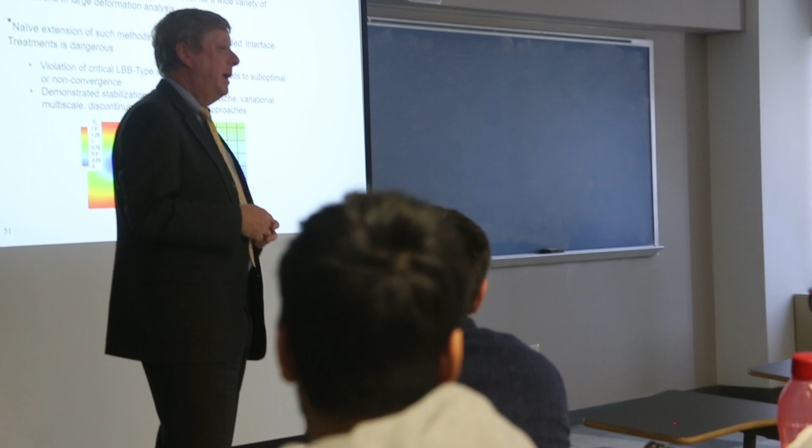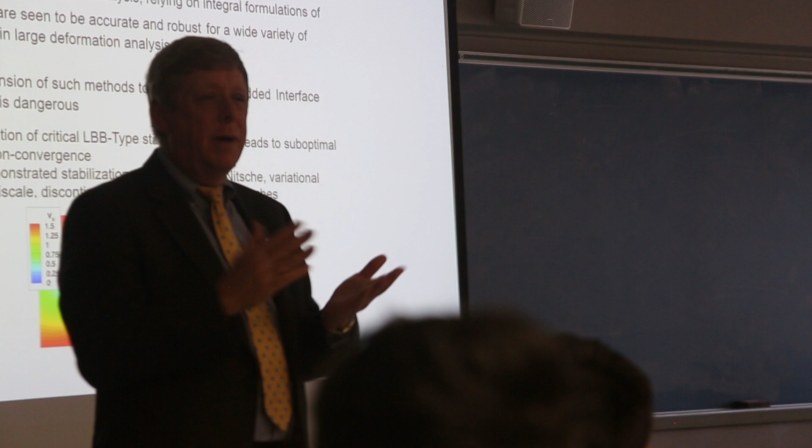I think we're sort of to the point where it could be credibly done. Think about it this way, for those of you who model things like damage: when we entered this field 30 or 40 years ago, all you had was these sets of discrete Lagrange multipliers on an interface, and where do you even start in coming up with an approximation of damage models? You need to involve things like slip velocity and pressure and frictional traction and maybe history variables. There just wasn't even a kinematic framework to think about those kinds of things. Now that we have some of that a little more established, and it turns out to be the right thing to do numerically, there's a little more hope for doing things like that than there once was.

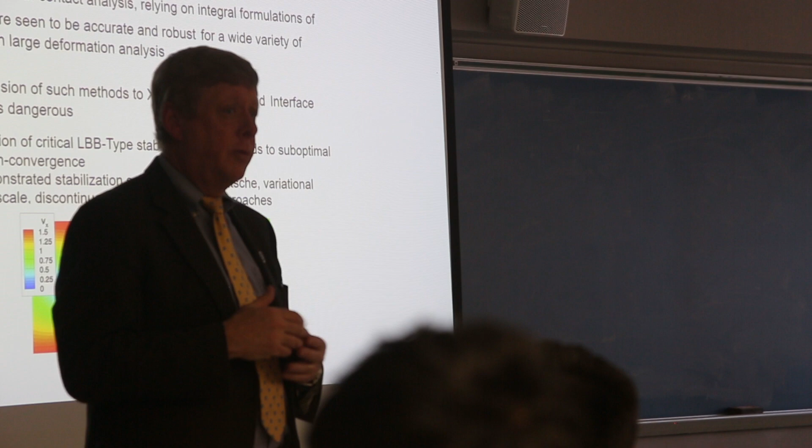We just calculate the entropy generation in the system to get the damage. Right, but you have to calculate it for all the mechanisms because there are multiple mechanisms. Right, and that's not easy.